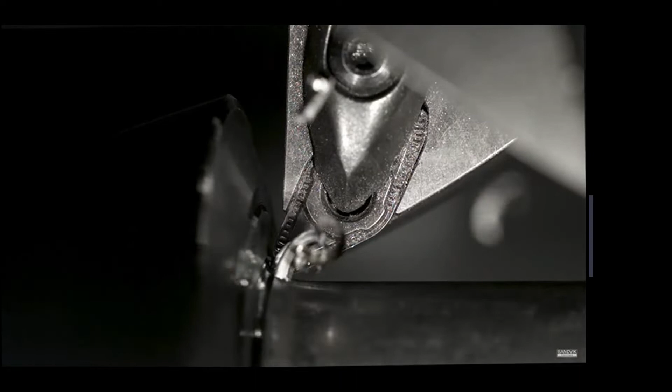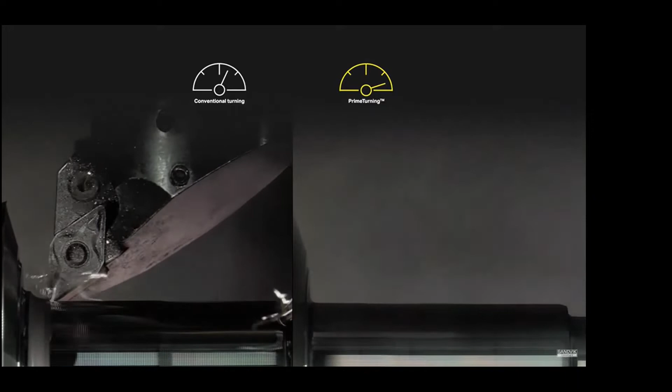So prime turning is a new type of turning that uses specialized tools to achieve vastly improved cut times and minimize tool wear. Prime turning offers the flexibility to turn in all directions, delivering a productivity increase of more than 50% in many existing turning operations. It also allows you to apply higher feeds and speeds compared to any conventional turning operation while still maintaining the same close tolerances and chip control. At the same time, prime turning provides substantially higher tool life.

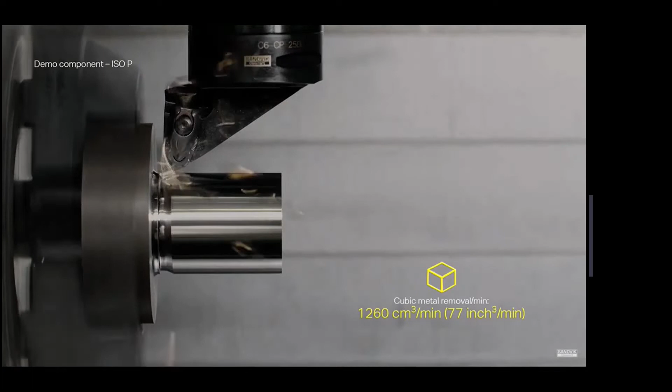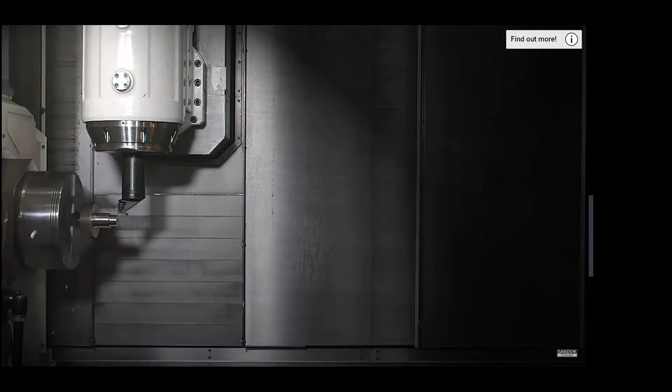If you're not familiar with prime turning, I recommend you talk to some of the Sandvik guys here, but you can kind of see how it directs the chips like this. That's a big thing. You don't have to worry about it wrapping around your part or anything like that. We're also taking pretty hefty cuts. And I think the video shows it, but we have bidirectional cuts on both types of tools.

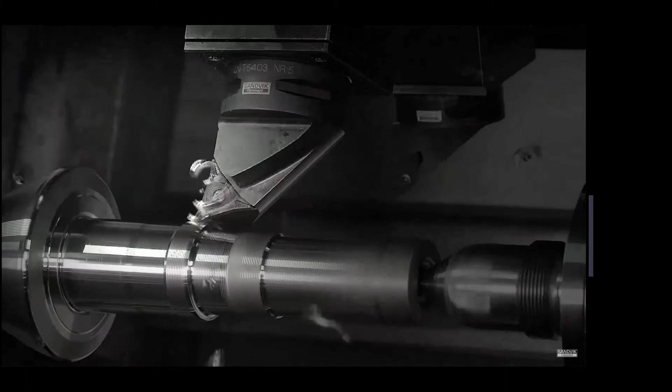So we have two types of tools here. This is the prime A here, and that's the prime B. And I'll talk more about those here in a little bit when I jump into my demonstration. But yeah, I'm really excited that prime turning is coming to GibbsCAM. So let's jump into the GibbsCAM side of this.

So this is a part I want to demonstrate. First thing I'd like to do is kind of show you guys the tools. So when you jump into your tool menu here, we have two new types of tools, prime A here and prime B. This is a prime A down here. And while it can take deep cuts, it's mostly meant for maybe your finishing passes or lighter cuts. I believe you can use each one of these three sides of the tool. It rotates in the holder, so you're getting a lot of longevity out of this tool here.

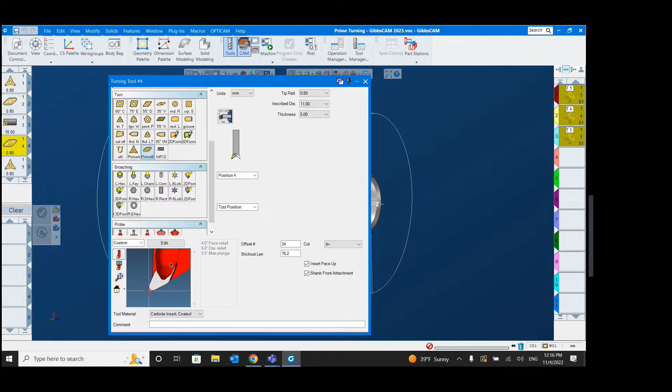And then the other one here is the prime B. This is what this guy looks like. This is more your workhorse. This is what we're going to be using to rough out our part and take as deep cuts as possible here. So let me show you how to make operations with these. So I'm going to start off with the facing operation here, and it's not really a deep cut, so I'm going to use my prime A insert for this.

Probably both would work. And then down here in the turning section, we have a new process type called prime turning. Now, this is the only type of process you want to use with the prime A or prime B tools. The tools are specifically made to work with this operation type and these kind of motions. So it's important that you only select prime turn when you're using prime turning tools. And likewise, you don't want to use any normal tools with this prime turning process either.

Okay, so the first thing you want to do is fill out one of these four boxes here. So this is going to be a front face operation because it's a facing operation, and this is a metric example, so that's why my numbers are so high here. I'm not going to bother leaving any stock, and I'll talk about most of this stuff a little later, but those of you who are familiar with GibbsCAM processes know that there's really nothing new here. Everything I'm doing is how I would set up a normal facing operation.

I'm going to start off my stock above, go below the midpoint, and generate it. So that's how easy it is to make a facing operation. Let's do something a little bit more substantial. So I'm going to do some OD roughing next here. So I'm going to be using my prime B insert. This is the big one.

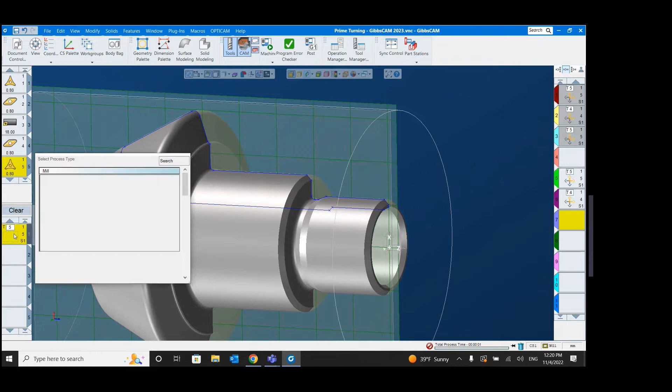I'm going to make one more toolpath here with my prime A. And this one will be a finishing pass on the OD. Not going to leave any stock. All right, and then I'm just going to set up my markers.

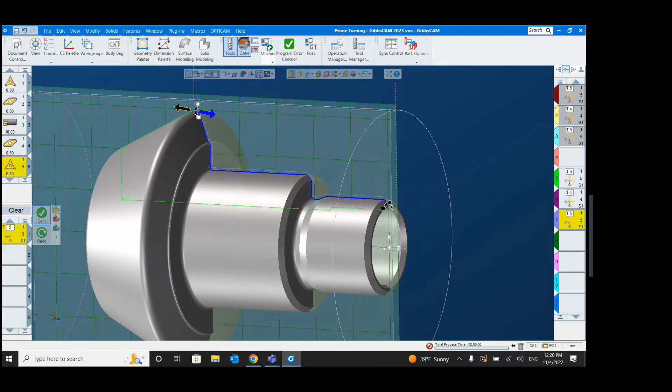All right, so as you can see, if you're familiar with turning in GibbsCAM, you're probably already familiar with how to do prime turning. Let's look at this on a machine. We got our Hyundai Wia 2200 LSY. Get a good view here. All right.

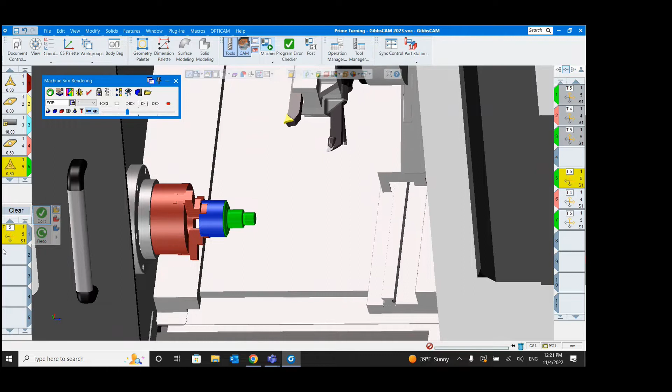So yeah, that's about it. Pretty easy to use. If you guys have any questions on prime turning, I recommend you can either talk to us or the Sandvik guys. They probably know a little bit more about it. I'm personally new to this too, but it seems pretty straightforward.

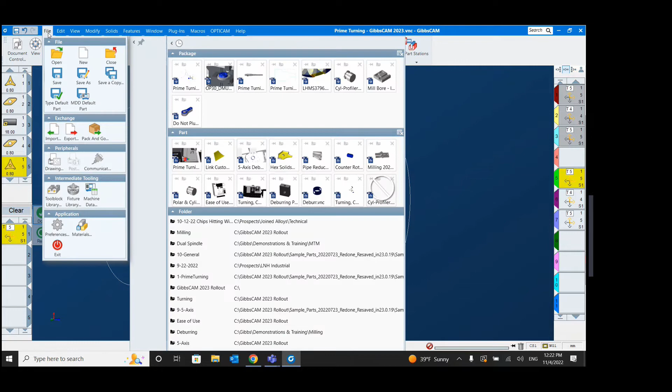I'm going to go on to my next topic now. I have something about part organization and ease of use in GibbsCAM and the things that we've updated here. Let it load for a sec. Okay, so I got a relatively simple part here. I'm just using it to demonstrate some of these new features.

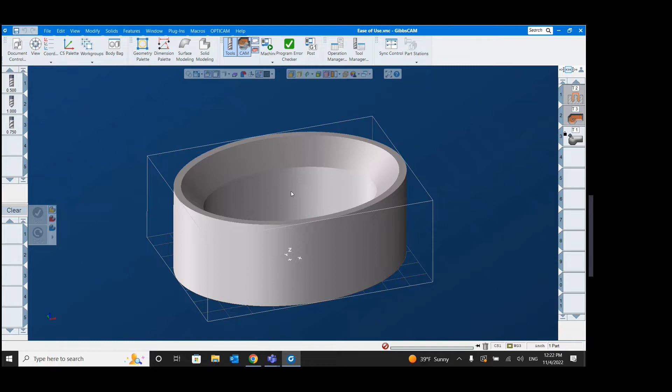The big new one that I know a lot of people will like is we can now sort our coordinate systems and workgroups into categories here. So if I jump over to my coordinate system list, I have 4 coordinate systems. This part was programmed to the bottom of the rotation of the machine here, but I also have a top plane. But now I can click here, new category, and I can sort these into categories.

So I'm going to make a folder that kind of makes sense. And then it's easy to just click and drag the relevant coordinate systems into this folder here. And I'll go ahead and create another one just for my other one.

So I know, and then I can show all of these, I can hide all of them. So it's got a little red cross here at the bottom for each one of these if I want, and I can collapse these. So a lot of people have been asking for this.

I also have some workgroups here. So, if I turn on my geometry, I used a point there for a hole, and then I use this for some stock creation and other things. So pretty cool. I'm excited about that too.

The next thing I want to show is something called work areas in the document control dialog box. Now, this is actually something that we could do before in GibbsCAM, but you had to contact the post department or your reseller and ask them, hey, I need to update my MDD, and then they'd have to change it and get back to you. Now they've put this functionality into the user's hands, so hopefully reducing the need to contact everybody.

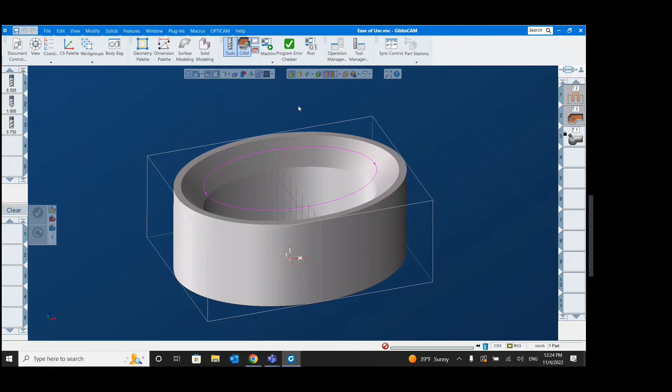Let's go into my machine sim here, and I just want to show the problem that I'm having with this operation here. So the operation itself is fine, but the trunnion's tilting backwards, so not only can I not see it as a programmer, but the operator is not going to be able to see what it's cutting, and in general, it sounds like people like it to tilt forward.

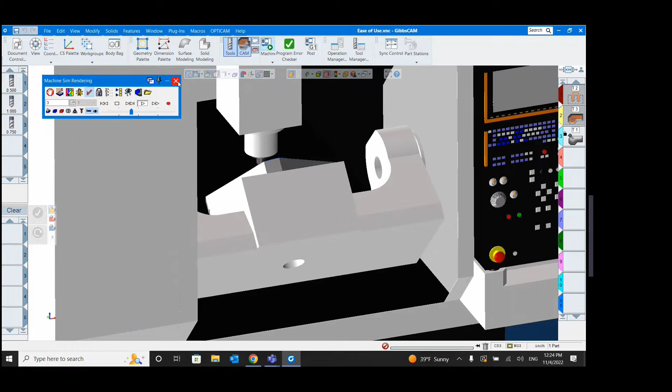So now what we can do is go into our document control dialog box here, and we have a new section called work areas. Now this will only show up if you have a machine with 2 rotary axes, so in general, that's a 5-axis machine. I'm going to click new work area and give it a name. And so now my second rotary axis is my A axis here, so I can check these on and I can tell it, hey, I need you to stay between 0 degrees and 120 degrees rather than going from 0 to -20 as it was before.

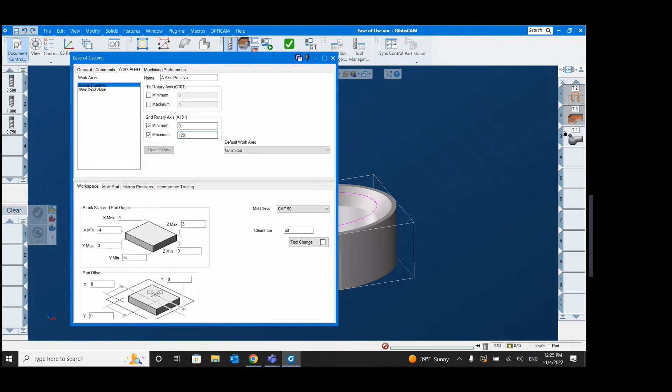Once I've set this up, I can close this, and then I'm free to apply that to any operation that I want. So I'm going to apply it here by going to operation data, and any work area that I've defined should show up here. So I'm going to select the one I just created. And I actually don't even have to regenerate my operation. My operation is going to stay exactly the same as it was, except all the A minuses are going to be positives here.

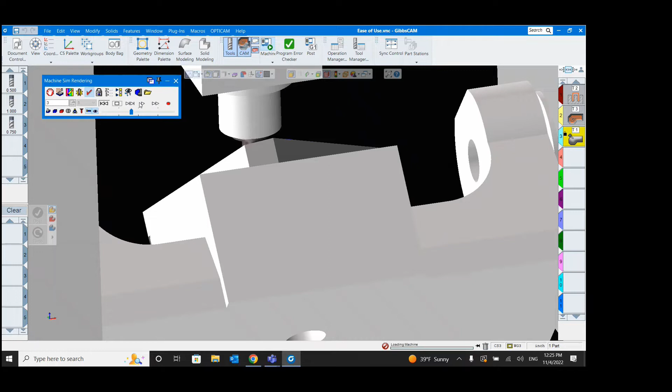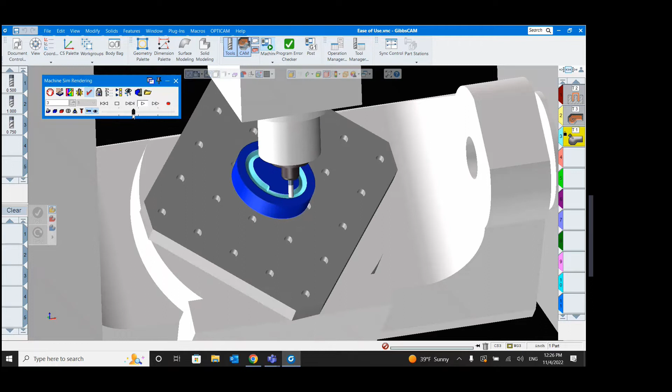So I think that's nice. You could also do it with the C-axis, or if you have an MTM with a B-axis or something like that, you can still utilize this in that way as well. So pretty good stuff.

The last thing I want to show you, really the big thing that's new in GibbsCAM 2023, is you might have noticed that I have 3 operations here, but every time I went into Machine Sim, it was only playing 1, right? That's because I have these first 2 operations deactivated. So they're still here, but you can tell they're deactivated by the darker gray background here. And it's easy for me to just activate them like this.

But the purpose of deactivating and activating operations is if I want to experiment with programming a part 2 different ways, and I want to use certain tooling on my first try and certain tooling on my second try, or I want to compare run times, I could do both of those operations here in GibbsCAM and then compare them separately on an op sheet to see how long each one took, that kind of thing.

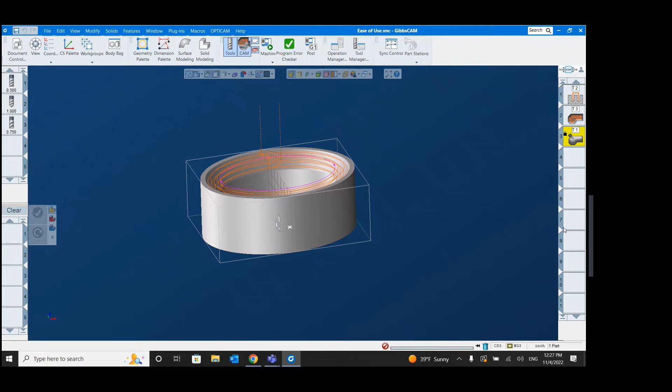And before, if I was using any kind of material only option in one of my processes, it would think that there's no material there because I already have operations. So now we can just deactivate them and pretend that they're not there. So those are the big things in terms of ease of use of GibbsCAM 2023. I'm going to move on to some milling stuff here.

All right, so I think this one's a big deal too. If you've ever used live tooling on an MTM machine to make a channel or anything that's not in the XZ plane here, it can be kind of cumbersome. So if you're not familiar, what you have to do is select your face, you have to extract the geometry, right? And then that'll extract it along the circle here.

The cylinder, but then you have to unwrap it, right? So GibbsCAM makes it flat with unwrapped, and you get something like this. I had to manipulate this geometry a little bit, so I had to connect a few things. I had to make these lines here so that it's a closed profile, and then I had to make these walls so that GibbsCAM knows that there's no solid there, and then it can break free and kind of do what it needs to do.

And so there's a lot of steps. I want to say 5 or 6 steps. It can take 10 minutes per channel that you're doing. So we added something new here. So we can just skip the geometry altogether. So most of you should be familiar with the slice planes. They usually use your coordinate system to cut your part and get shapes. We now have a cylindrical one here.

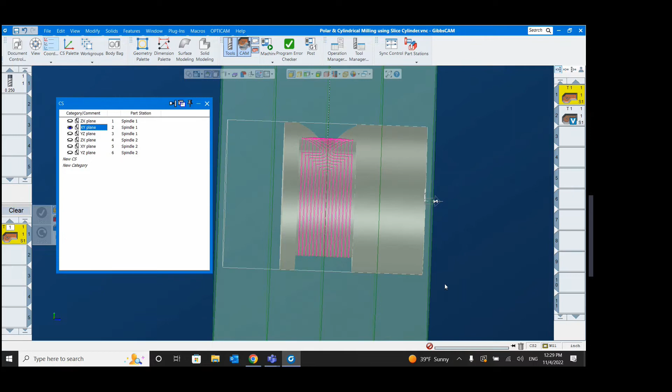So when I turn it on, it comes on in my active coordinate system. That's not the one I want to use it in, so I'm going to switch my coordinate system to an XY plane here. And then I can kind of click and drag to make this the size that I need. Right, and it's just a shape getter. You see when I intersect the solid, it brings up these little gray or green lines, right? I'm going to put it at a depth that I know is going to get the exact shape that I want.

But now all I have to do is just select these sides and hit do it, and it'll make my operation right away. So there's no geometry involved, nothing like that. As soon as I'm done, I can just turn it right back off. There's really no difference in how you set up the processes or anything. So that's a big time saver for people who do a lot of MTM work. And in case you're wondering, it does actually work in VoluMill as well.

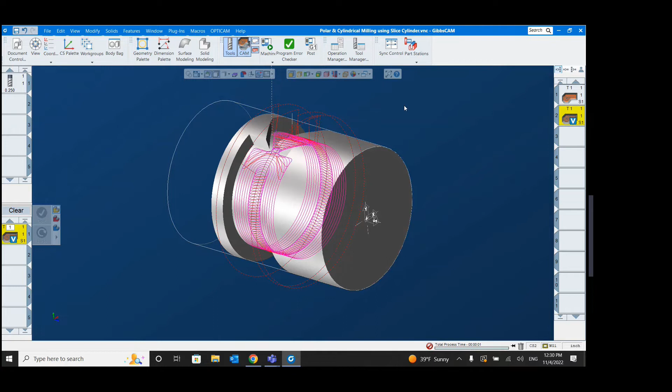So because VoluMill is made by a third party, Celeritive Technologies, the process acts a little bit different when we do it. So we have a lot of maneuvering and stuff like that because this operation was generated off of a 2D flat unwrapped geometry. But now I can just turn this on, select my bounding geometry here, and hit redo. And you see there's a lot less maneuvering. We have one entry point.

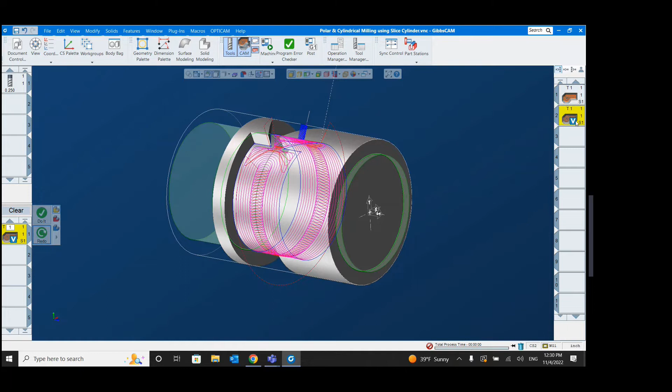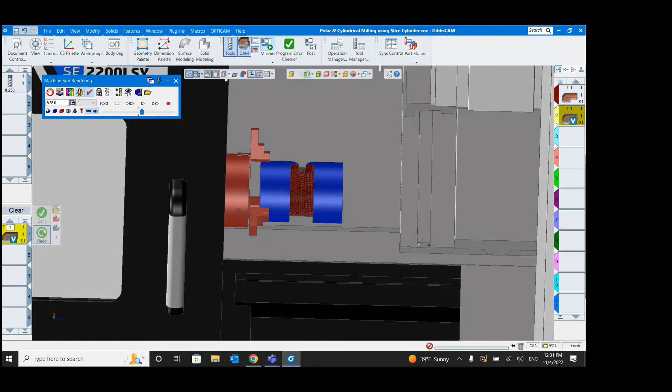So let's take a look at these operations. I'll do the first one first. So another thing here, it's plunging right in, which may or may not be okay. So that's the original operation, and then let me show you the other one. And in true VoluMill fashion, it makes a slot and then goes out of the slot. So that's a big time saver for anybody who's using MTM.

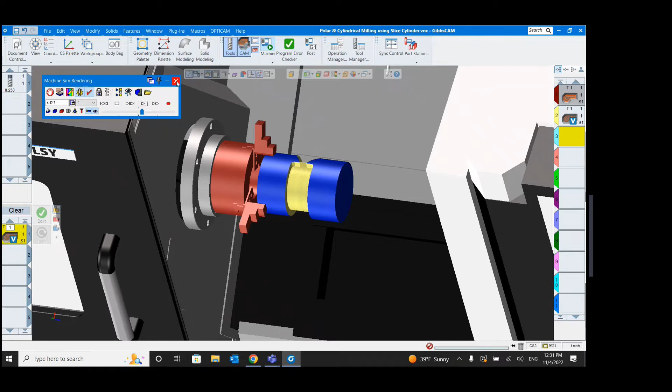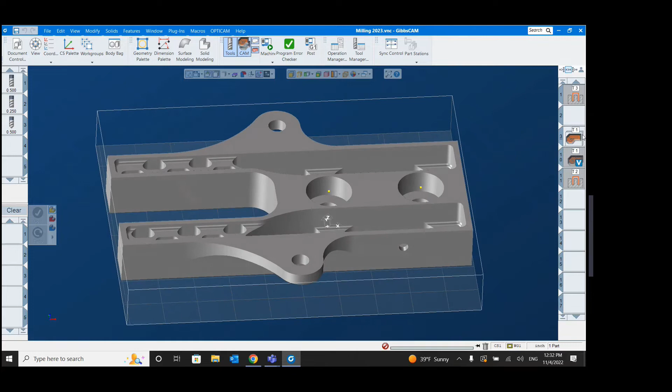Right, one more thing in milling that I'd like to show you. All right, so this is another really simple one, but a big one in my book. So I want to rough my whole part, the outside of my part, but it always keeps plunging in here. So all I did was select the tool I want, select my entire part, and hit do it on a roughing operation. And it's entering from the sides like I like on the outside, but it's still trying to plunge down into these holes, these cavities, all this kind of stuff. Anywhere the tool is going to fit, it's going to try and get in.

And I want to do those features with different tooling, different methods, using a drill maybe for some of these holes. I don't want to plunge with the mill. So we now have a super easy option here in our box. Instead of auto plunge, I can now say do not plunge. And so it's going to have the exact same behavior, but it's not going to try and get into these cavities.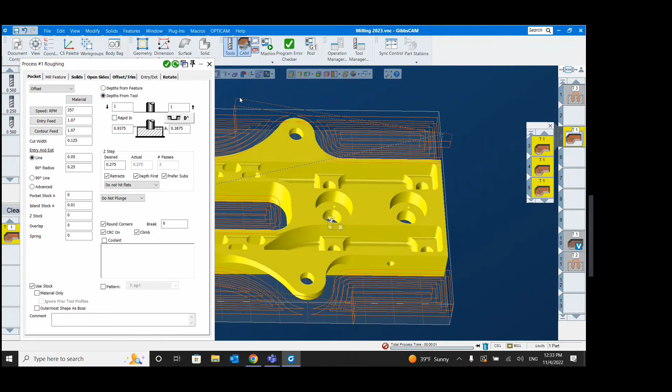So I know a lot of people are extracting the geometry on the part and using that as a boundary so that it doesn't try and go in those places. I've seen people extract geometry the size of the stock and make them all air so that it'll break through and that kind of stuff. And all that kind of stuff is automatically handled with this new operation.

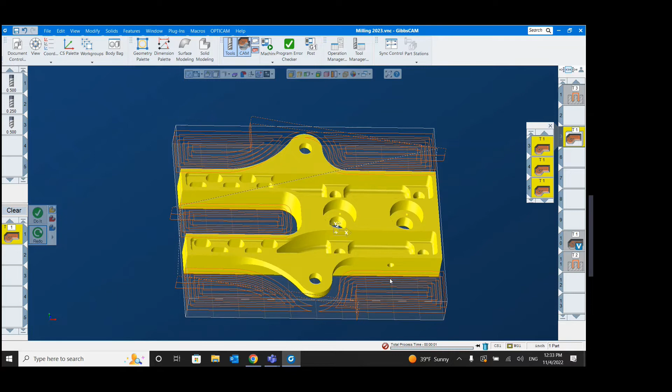So that's extremely nice, I think. The other thing you might be wondering here, I'll leave those activated: does this work with VoluMill? And yes, it does as well. So VoluMill does it all in one operation. You see, it just goes around, and so we're saving a lot of time using VoluMill in conjunction with this operation. The VoluMill dialog box is a little bit different, so I'll show you where it is here.

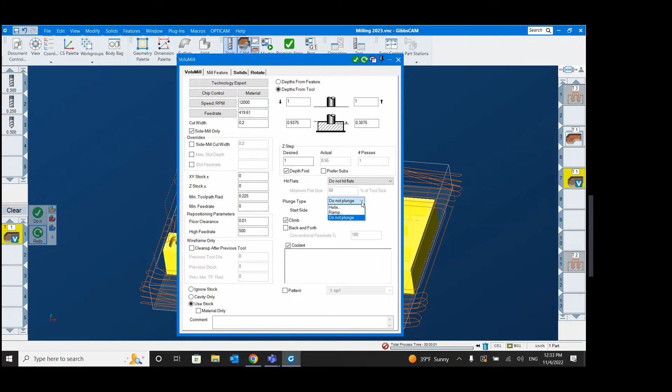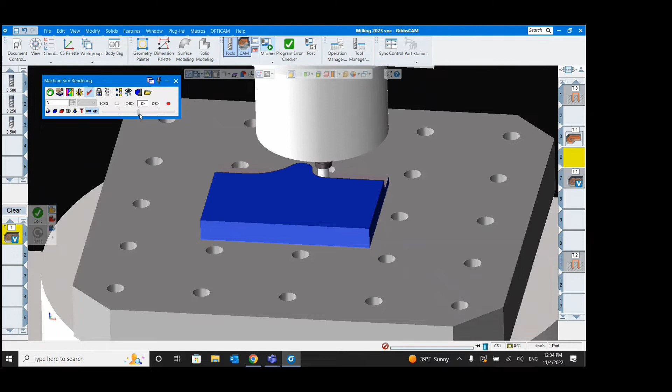Plunge type, do not plunge. So really cool stuff. Let's real quick take a look at what this looks like on the machine. Enters from the side and comes outward. And we don't even have to worry about the cavities. And this is the VoluMill here. Kind of scrapes away at the sides and goes inward here.

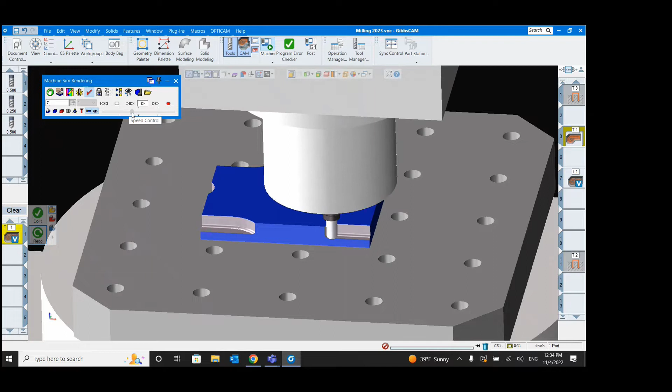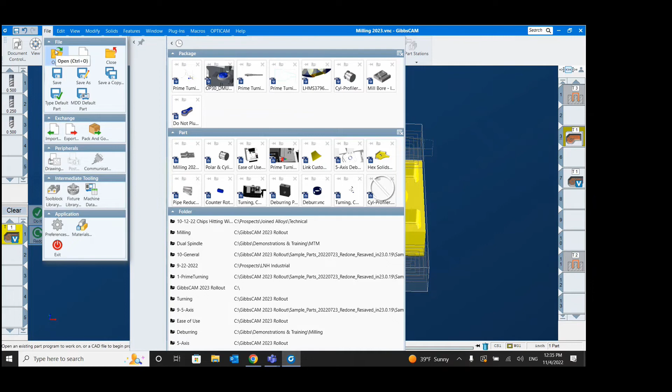Yeah, another simple improvement that I think everybody will like. Let's do a little bit of turning now. So we actually had elliptical turning in previous versions of GibbsCAM. For those of you who may not have attended those or don't remember, this is how we turn shapes that are, one, not necessarily a circular profile, and two, that might be off center, right?

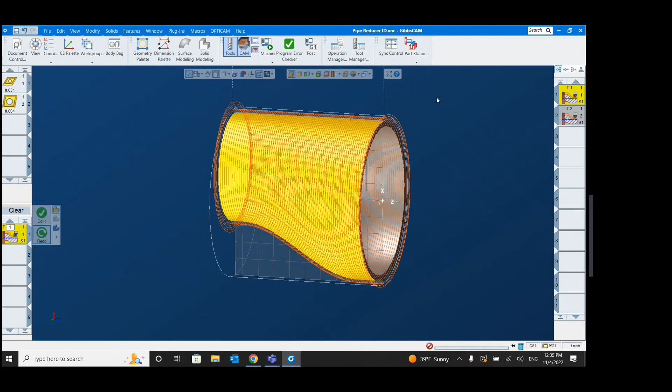So if I get a top-down view, we can see that this first part is regularly turnable. I don't know if that's a word. But then it kind of goes off center here. So this is what we had before, we could do OD. And I'll just kind of show this on our Hyundai Wia to give you a little refresher here. All right, so there's our part, our stock rather.

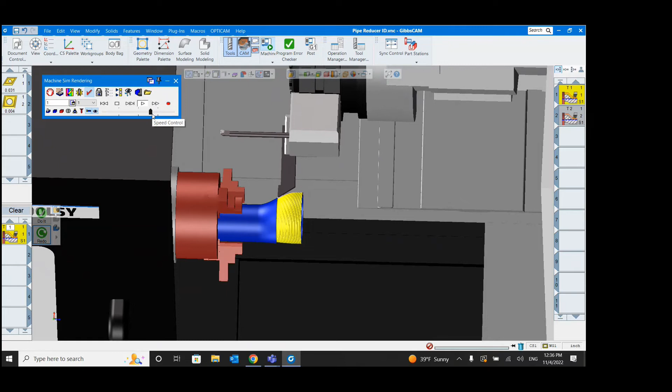And it starts off as a generic turning operation for the flat part, but once it reaches a point where it's off center, it compensates using the 3 linear axes so that we can still turn it off center. Kind of looks like it's bouncing on the surface there. So this is really good. If you don't have any live tooling to mill this, you don't want to take it off this and put it on a separate machine and do another setup and all that kind of work. This saves you a lot of time as well.

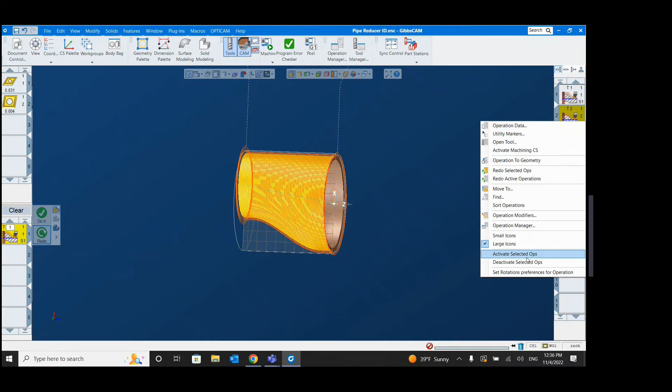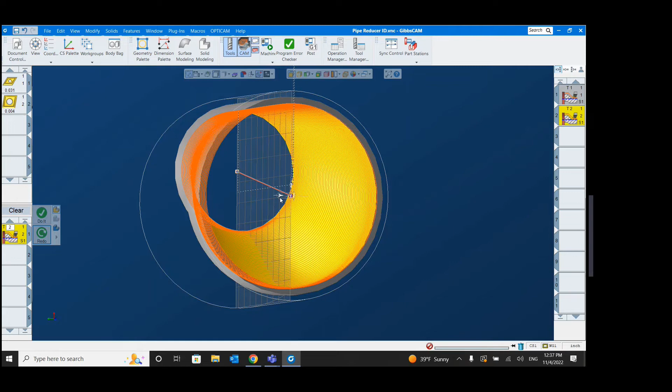So we've had that, but now in GibbsCAM 2023, we can now do ID work. And ID work was a little bit more difficult to develop because you run into clearance problems and all that kind of thing. So there is an extra step in making this operation where you need what they call a spine curve going down roughly the center. In this case, I just made a point here, I made a point here, and then connected them with a linear line. And I think that'll be good enough in most cases. But if you have some real clearance issues, you might want to make a more accurate spine curve.

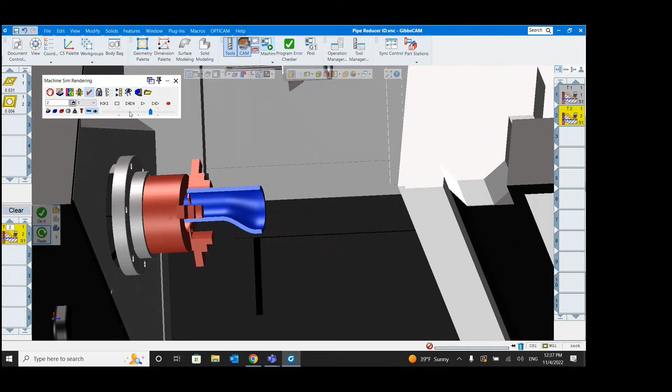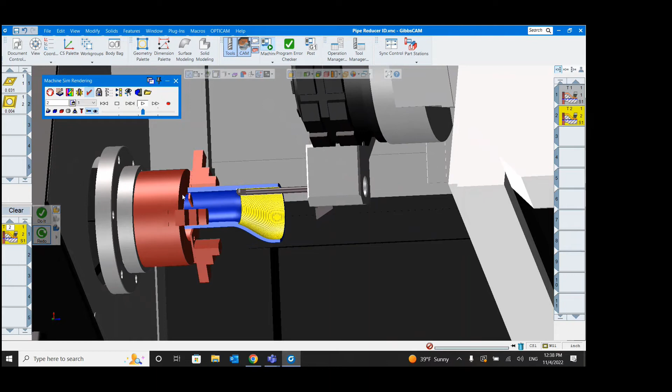But let me show you how this looks on our machine. I'm going to switch it over to half mode so that we can see the ID, get a better view. So really cool stuff. Anybody who's already using elliptical turning is going to love this as well. So, all right. The next one. Here we go.

This next one is lathe drilling with a counter-rotating live tool. So this is for people who have live tooling. And so we've programmed this part. We got a ton of operations here. But really all I care about in this example is the centerline drilling, oddly enough. So if you're finding that your maximum spindle feed rate is not able to get to where you want it, so in this case I'm using my Hyundai Wia, which the main spindle maxes out at 4,500 RPM, which is pretty good, but let's say I had a machine that couldn't quite go as fast, and I wasn't able to reach the RPM that I needed for a particular centerline drilling.

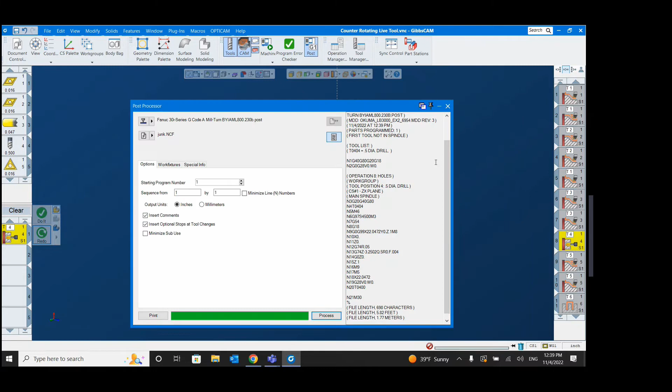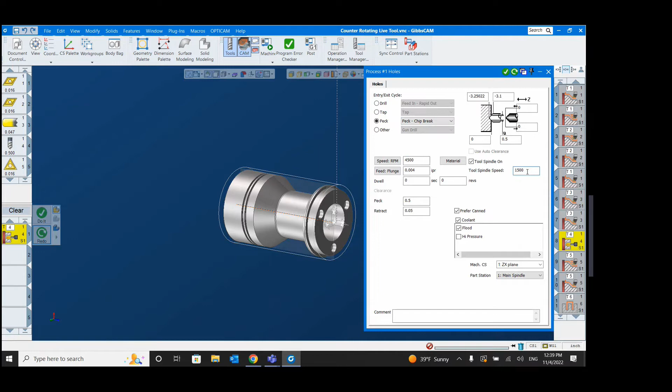So in this case, we're maxing out our spindle feed rate here. But since we have live tooling, we can use live tooling to rotate the opposite way and increase our effective RPM here. So I'm maxing out my RPM here. We can select this now, tool spindle on, and this is how fast your tool is going to go in the opposite direction. So if I put 1500 here, it's adding the 4500 from my spindle and the 1500 from my live tooling. So now when I redo this, the toolpath actually doesn't change. It looks identical. Oops, didn't mean to do that.

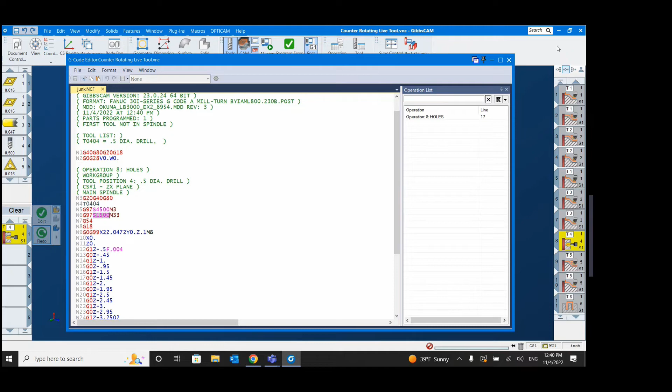Now when I post this out, we can see that we have an additional 1500 RPM. So if anybody has live tooling and is cutting hard material, I think this is a pretty cool feature that we've added here. Okay. Next one I want to show you is just a general enhancement.

This has to do with collision reporting.

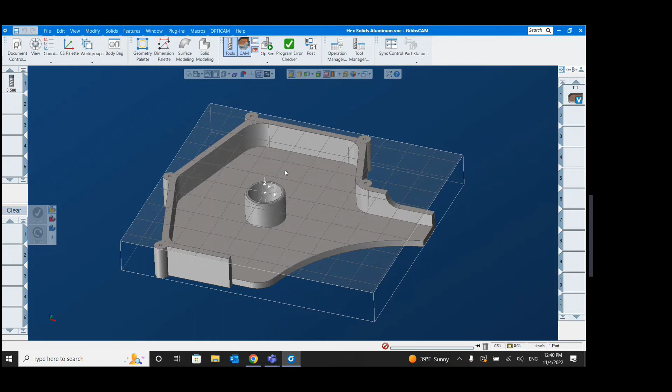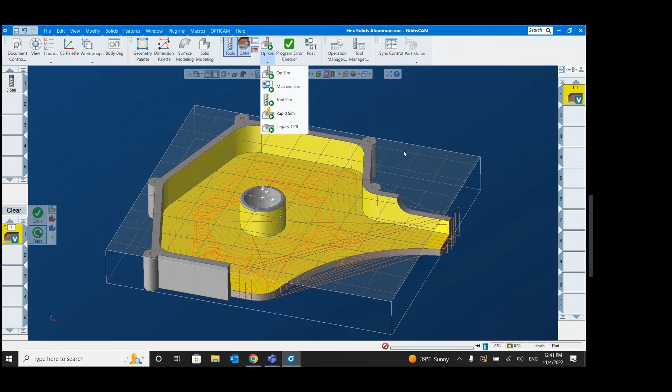So I have a volume mill operation here, and those of you familiar with volume mill know that it goes very fast at times. This is an inch depth of cut, I believe it's aluminum. But I'm worried about my fixturing when I'm holding this down, or it feeding too fast into my part, something like that.

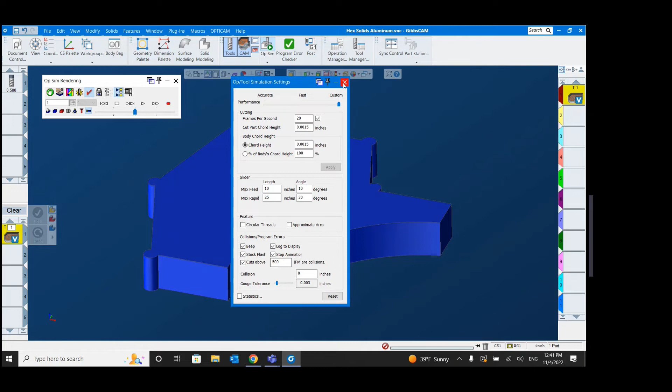So now what we can do is go into OpSim, and when I right click the toolbar here, go down to settings, we have a new option in collisions and program errors to alert me if I go above whatever IPM. I'm going to leave it at 500 here, and it's going to flash the stock, beep, log to a display, and stop the animation when my toolpath goes over 500 IPM. You also have to turn on your collision checking here.

And right away it hits 500 already. You can tell because it says high feed clash here. If I keep hitting OK, it'll keep stepping forward. You see how there's this light red - that's where it's going over 500 IPM. If I don't want to keep hitting OK, I can just press play here, and it'll log all the places where it went over 500 IPM and map it out on my part as well.

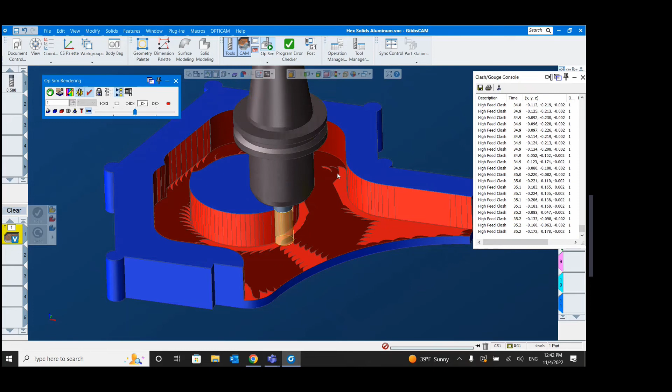So if you're familiar with volume mill, it makes these little slots here, and once these slots are made, that's when it goes as fast as it can out of these slots. So we can see all the walls here - it's going pretty fast, going fast around this boss.

So just a good reporting tool, and you don't have to use it with volume mill. I just thought it was a good example, but yeah, you can now have it tell you how fast you're going.

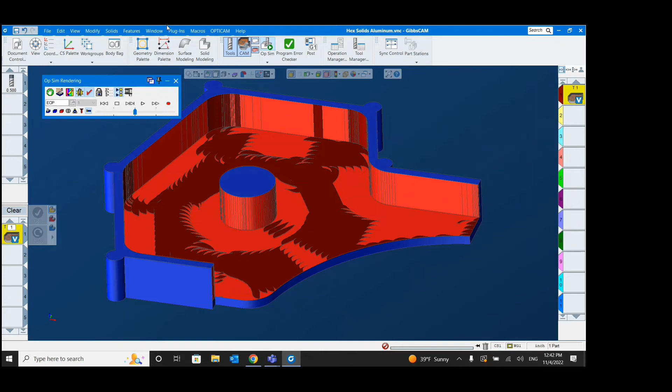The last two things I want to show you are 5-axis. I know a lot of people who have 5-axis love the 5-axis deburring, where you can just click your part and it'll deburr, add fillets to all the edges throughout your part here.

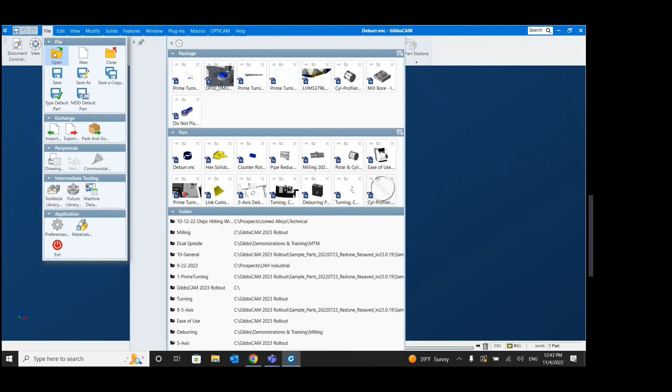I'm sorry, I opened the wrong one here. Give me one second.

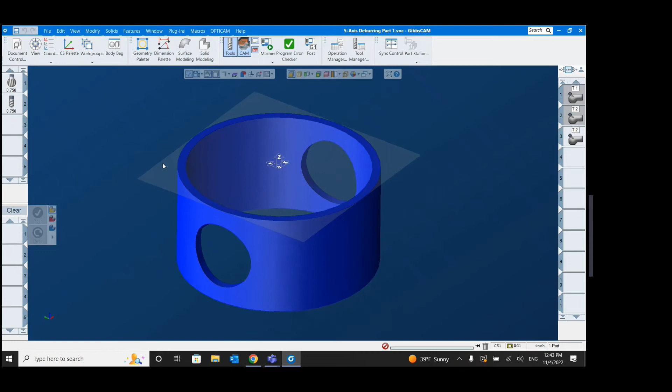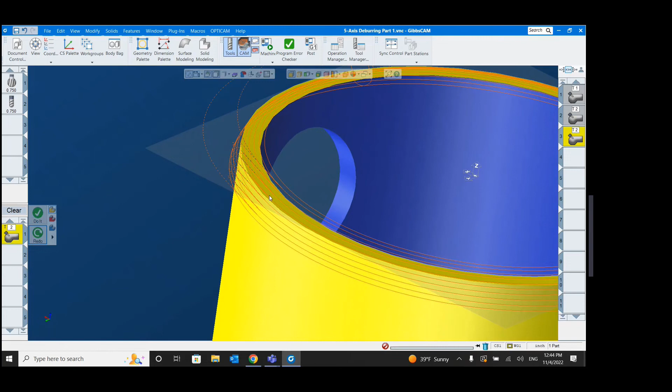Okay, all right. So how you use the 5-axis deburring is you select your part, or at least two surfaces, and anywhere those surfaces intersect, it's going to try and add a fillet here. This is something we had in GibbsCAM already. But you see there's a lot of lift up moves here, and you might get what they call a knit line - every time it's lifting up and stepping down and re-engaging in the same location, so you can end up with a line on your finish, which is obviously not good.

Let me demonstrate this in our machine sim. So it lifted up there, and I think we get one every step down here now.

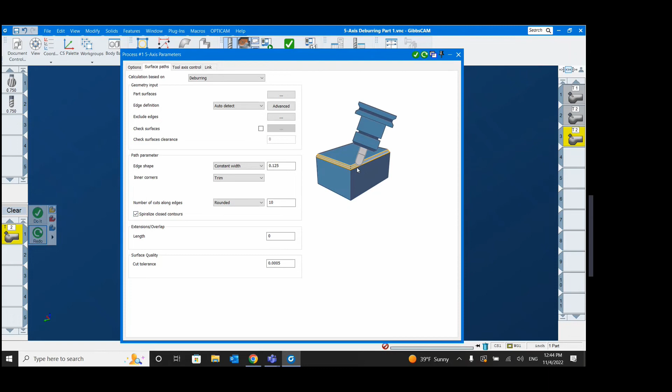So we've made an improvement to this in the newest version of GibbsCAM here. All I have to do is open up my process and go to my Surface Paths tab, and we now have a checkbox called Spiralize Closed Contours. Any closed contour, no matter what shape it is, it's going to spiralize it so that there's no lift ups here - you see all these are going to go away when I hit redo. So now we only have one time when it comes down and one time when it leaves.

All right, so that is our enhancement to the 5-axis deburring. The last thing I want to show is custom approaches and retracts in 5-axis.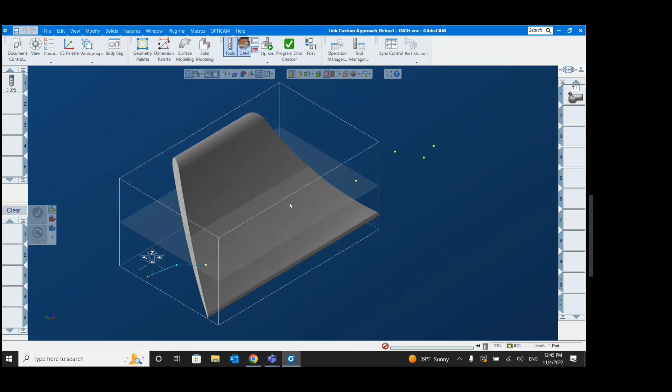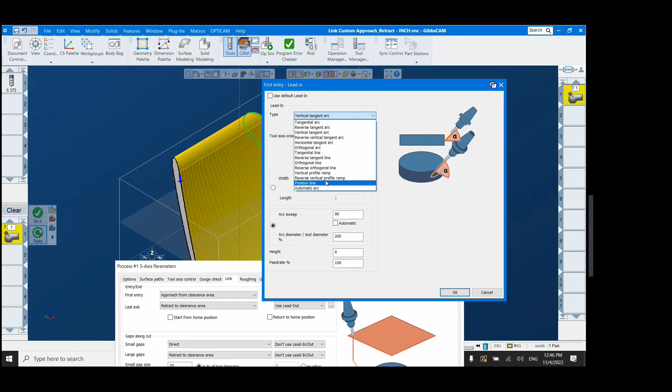We already have a million types of retracts and entries. If I come over to the Link tab, if anybody's used 5-axis here, you know we have a lot of different options. Not only do I have all these different types of approaches, lead ins, lead outs, but I can customize them using these dialog boxes as well.

So we had virtually unlimited control before, but the one thing we couldn't do is tell it where you're starting and stopping, right? A lot of times I want a vertical tangent arc, but it's hitting my fixturing. So how do I get around that?

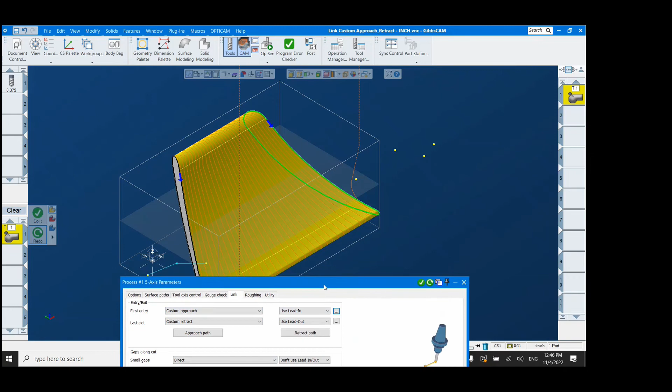Now we can add custom approaches and retracts. So custom approach, custom retract, and let me get my thing in a good position here. So this is my approach.

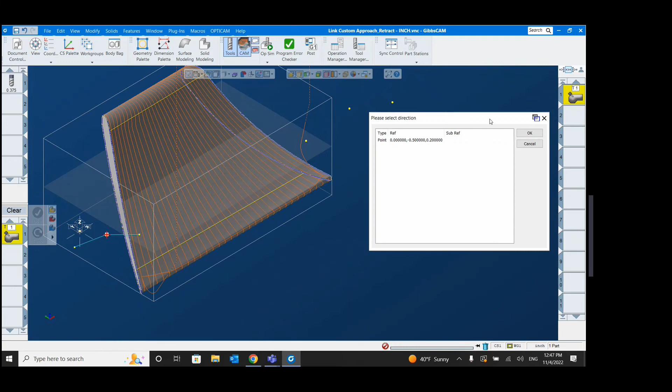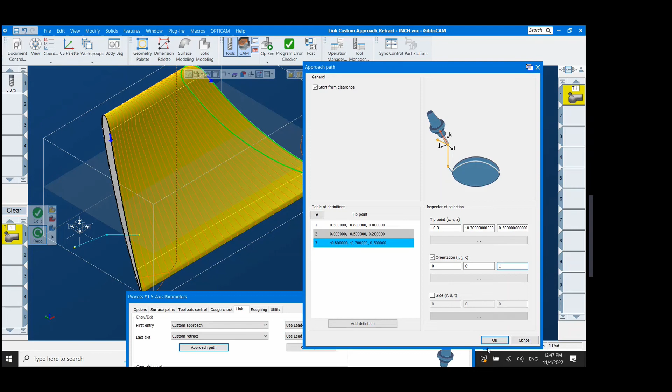I say add definition and say that I want to start here, and add another point, start here. Not only can you add the specific points where you want it to go, but you can also tell it what the tool axis should be at each individual point. At this point, I want it to go to this exact point, and I want it to go straight up and down in Z. This guarantees that at this point, the tool axis is straight up. I can do the same thing on the other side here.

Let me reposition. Okay, so I'm going to do the same thing on the way out.

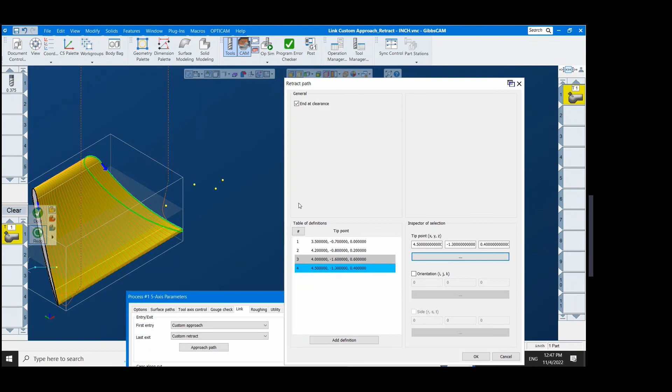Okay, so now that I've added my points, I can hit redo. Watch what the entries and exits do. So now you see it's entering here, it's following this line. If your points are connected, it'll make sure to follow the curve that connects them.

If I had a spline connecting these points, my toolpath would come down to this point and follow that spline to the next point. Whereas if they're individual points, it's just going to take the shortest path to get to the next point. So really now we truly have unlimited control with our 5-axis entries and exits.

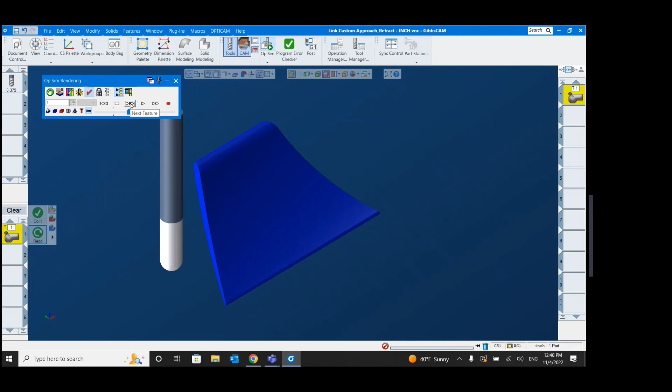I'll start by stepping down. Remember, I guaranteed that my tool axis would be straight up and down in Z on that first point. But then after that, I said I kind of don't care what happens.

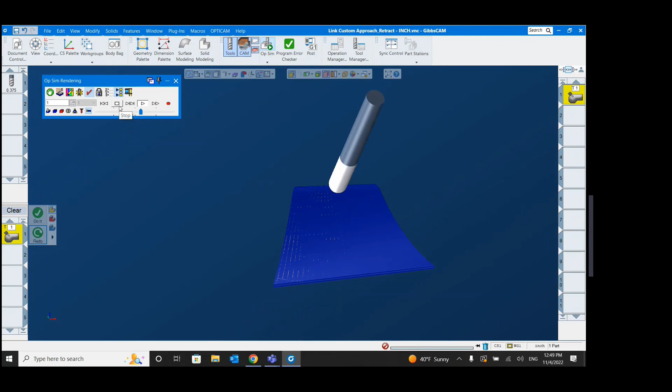It can be kind of difficult to stop the simulation right where I wanted here. So bear with me. Oh, I forgot to turn on my points as well. We're getting close, I'm going to play it slowly. Hopefully we can catch these points on the way out.

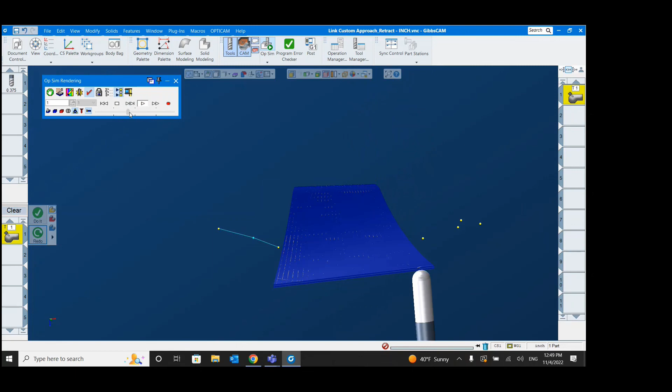One more pass. So it happened pretty fast, but it did follow these points on the way out.

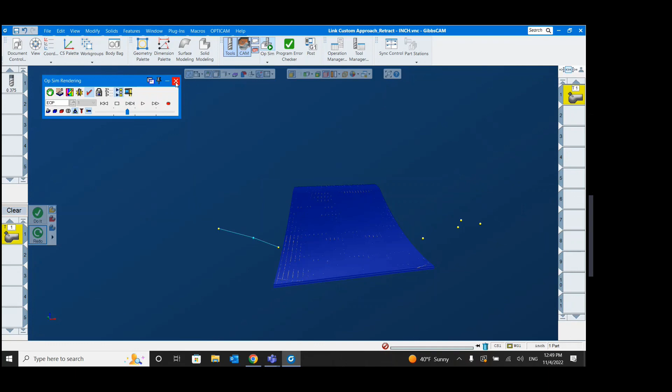So those are all the things I picked to show you guys for this presentation. But like I said before, we actually have a lot more, maybe 5 times more. We're going to be making YouTube videos and putting those online, and you guys should receive a link to that so you can watch those at a later time. But that's all I have for you, so I'm going to pass it back to Mike.